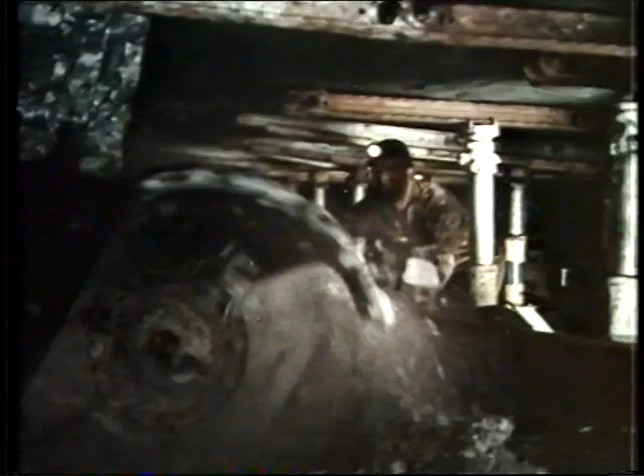Throughout the ages, man's comfort and economic progress have depended on fuel. And as man has advanced from the primeval swamp to the modern city, his demand for fuel has increased. But fuel is a wasting asset. The miner digs deeper into decreasing reserves. Axe and fire and erosion turn field and forest into desert.

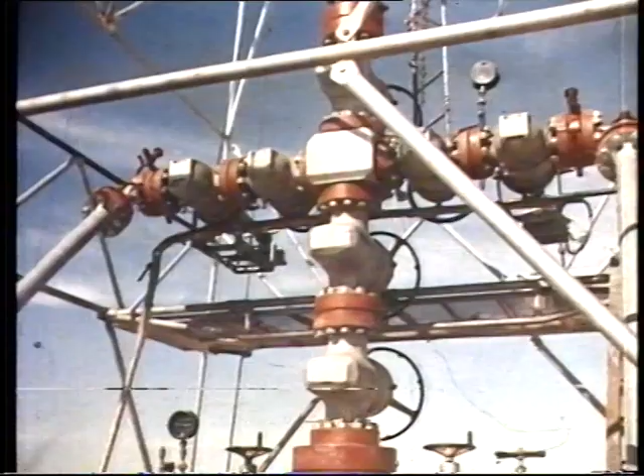Hence the unrelenting search for more fuel, more powerful, cheaper, cleaner, probing earth and sea. In the last century, they found oil, and with it gas, natural gas. For years, flared off to waste, knowing nothing else to do with it. Even later, when a use for it was discovered, it was confined to the country of origin, because no way had yet been devised of transporting it overseas.

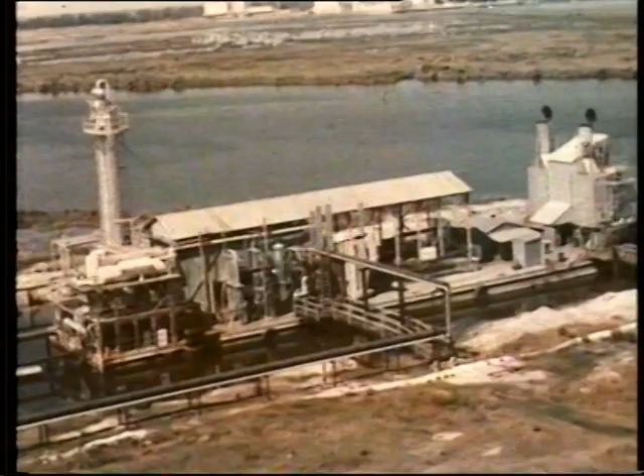Until 1951, when William Wood Prince, a Chicago stockyards executive, designed a special barge to carry condensed natural gas from his gas fields in Louisiana up the Mississippi River to use in place of expensive local gas.

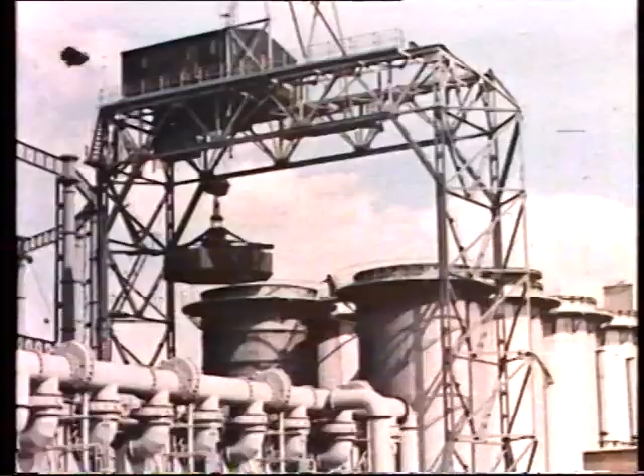This suggested to the British gas industry a solution to a growing problem, its dependence on coal. For a century and a half, coal had been the main raw material for the production of town gas. But with rising costs and increasing competition, new methods and other feedstocks had to be found.

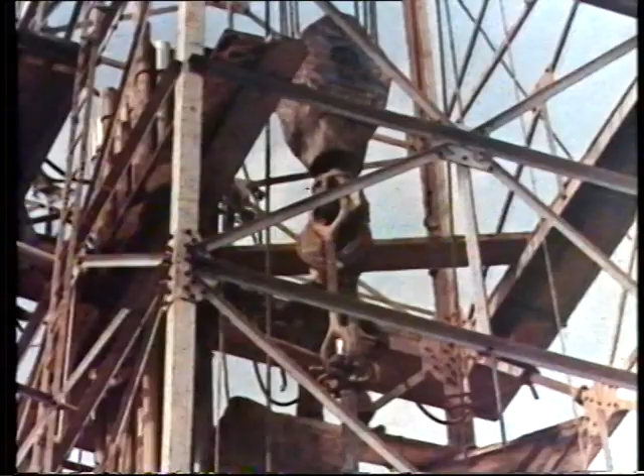The search for natural gas in the United Kingdom had been going on for some time, but with only small success. If natural gas was to be available to the British gas industry, ways and means would have to be found of transporting it from more plentiful sources overseas.

At the instigation of the Gas Council, Michael Milne Watson, chairman of the North Thames Gas Board, investigated the problem. And in the United States in 1957, Constock International Methane of New York were joined by the British gas industry to put all the years of experiment and research to the ultimate test.

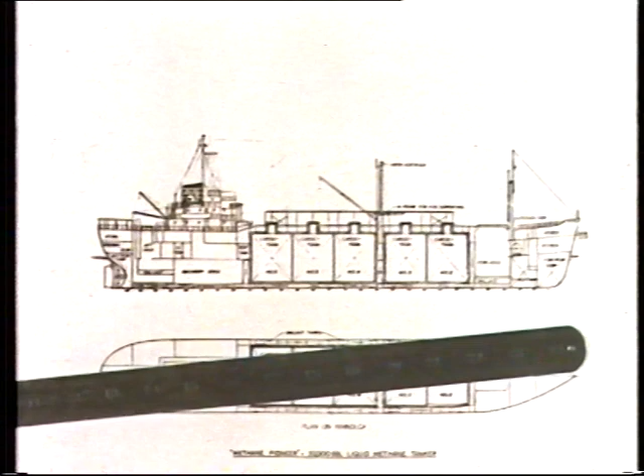At Mobile, on the Gulf of Mexico, they converted a dry cargo ship, renamed the Methane Pioneer, specially designed to carry natural gas by sea. The dramatic moment came at Lake Charles on January the 30th, 1959, when at last the Methane Pioneer set sail.

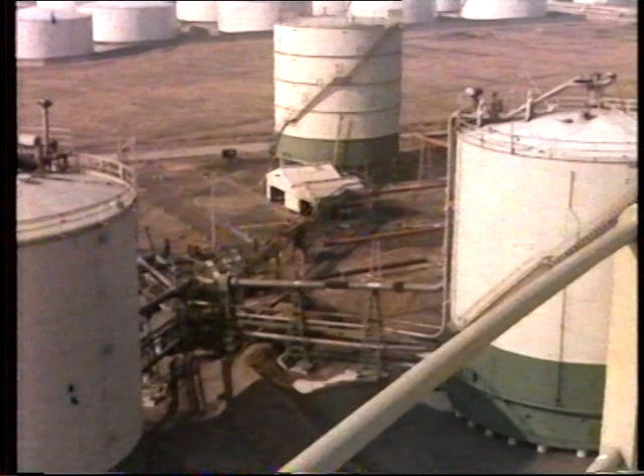Destination, Canvey Island, across 5,000 miles of sea. At Canvey, prototype methane storage tanks stood ready and waiting, while the tanker battled delaying storms. And critics on both sides of the Atlantic were saying she would never reach her destination.

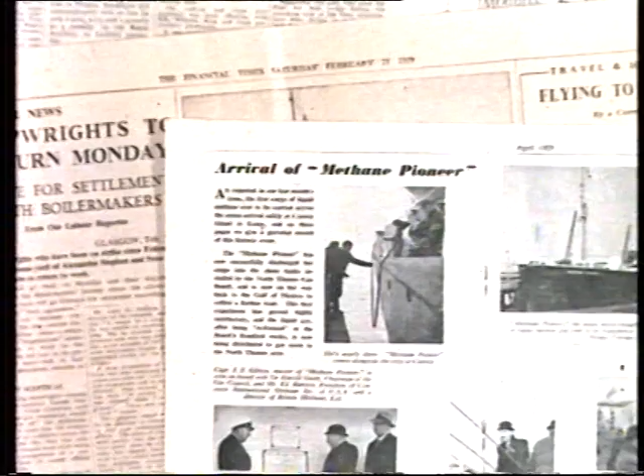But on February the 20th, 1959, the Methane Pioneer arrived. In her insulated holds, 2,000 tons of liquid natural gas, the first seaborne natural gas in the world. A way had been found.

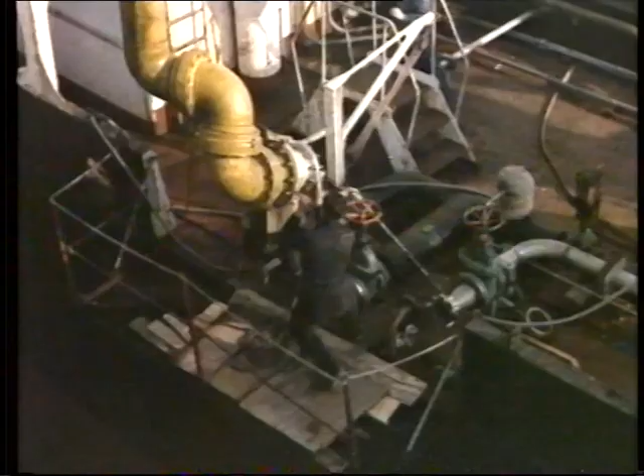So the 8 years of experiment and perseverance ended in triumph, and a new chapter in the history of world energy began.

Like a charred, lunar landscape in outer space. Suddenly, the third biggest gas field in the world. Hassi R'Mel means lucky well. Lucky for Algeria, who needed the assets. Lucky for Britain, who wanted the gas.

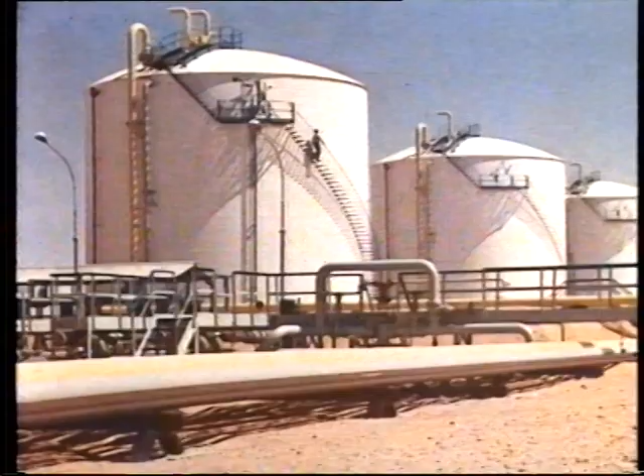In November 1961, the Minister of Power approved a contract to import 3,500 million cubic feet of Algerian gas annually. The stage was set for the plan to go forward.

At the London headquarters of the Gas Council, an operations room was set up to record progress on the biggest project of its kind this country had ever known, starting nearly 2,000 miles away in the heart of the Sahara Desert. This was the plan.

From the wellhead at Hassi R'Mel, there was already a pipeline to the coast at Arzew. At Arzew, a plant was to be built to liquefy the methane gas for transportation in 2 British-built methane tankers across the 1,500 miles of sea to Canvey Island.

At Canvey, a marine terminal to change the liquid back into gas and pump it out into the 350-mile pipeline from Canvey to Leeds. The schedule for this huge project was just 2 years.

Arzew. At the start of the methane project, a small port, suspended in time and space like a mirage between Algiers and Oran. In a country where past and present rub shoulders, as at some crossroad in history, where car and plane compete with the still surviving camel.

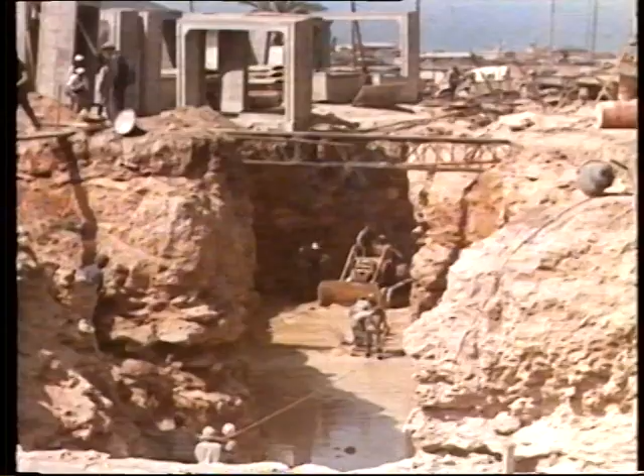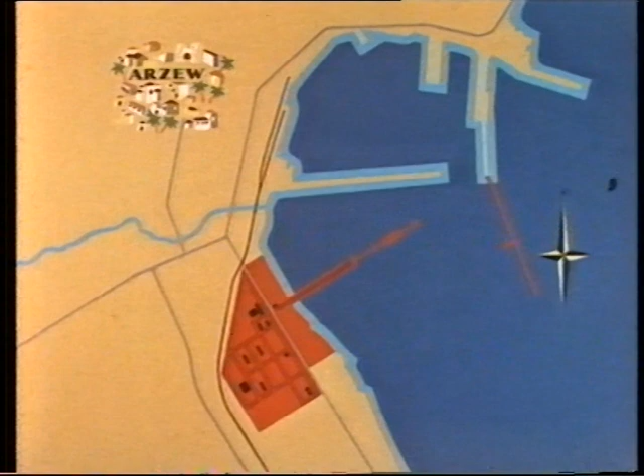For the Port Authority at Arzew, it meant dredging and new jetties to refashion the shallow harbor into a loading station for ocean-going tankers. For Société Algérienne du Méthane Liquide, it meant building the liquefaction plant, some of it on land reclaimed from the sea.

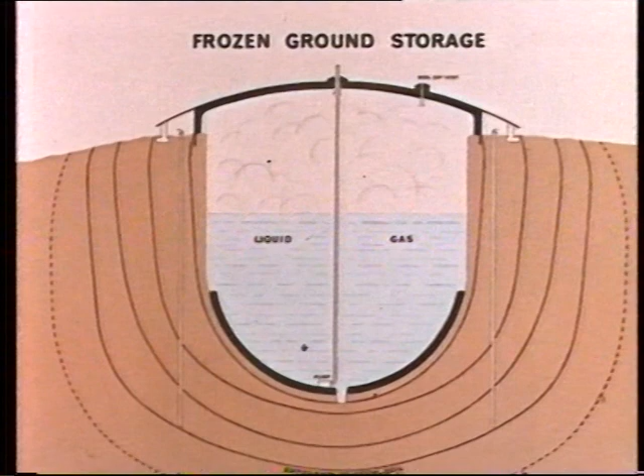Three special storage tanks above ground store a total of 18,000 tons of sub-zero liquid gas. And underground, another 18,000 tons, in what is basically just a huge pre-frozen hole in the ground, its icy walls kept sealed and safe by the cold gas inside. And finally, the building of the actual liquefaction plant.

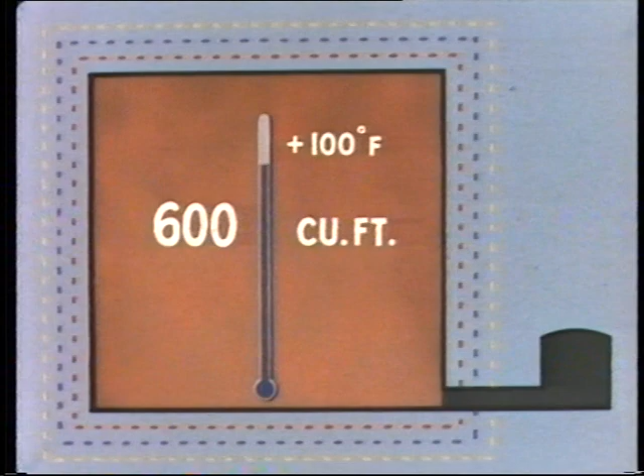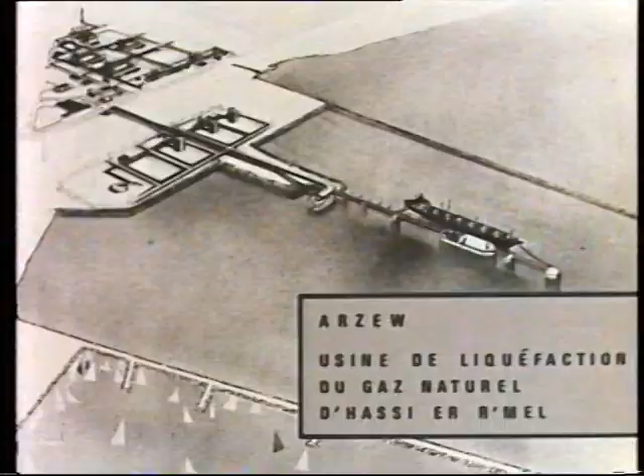To freeze every 600 cubic feet of gas down to an incredible 258 degrees below, at which it liquefies and shrinks to a single cubic foot of liquid. The enormous reduction in volume made it practical and economic to transport natural gas by sea.

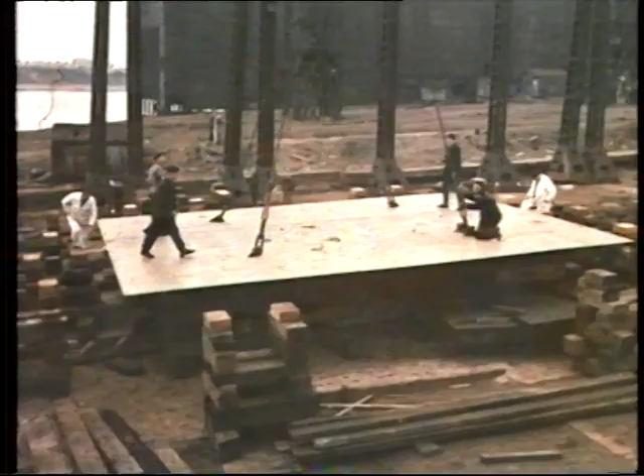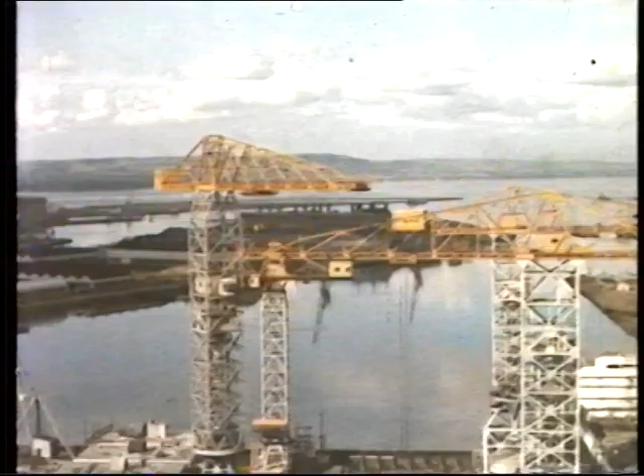At Vickers Shipyard, Barrow-in-Furness, the keel of the first methane tanker was laid in June 1962, exactly a year before the scheduled launching date. At Harland & Wolff, Belfast, the keel of the second tanker was laid four months later. Both tankers were built to the same secret and world-patented design, putting into effect the experience gained in the earlier trials across the Atlantic of the Methane Pioneer.

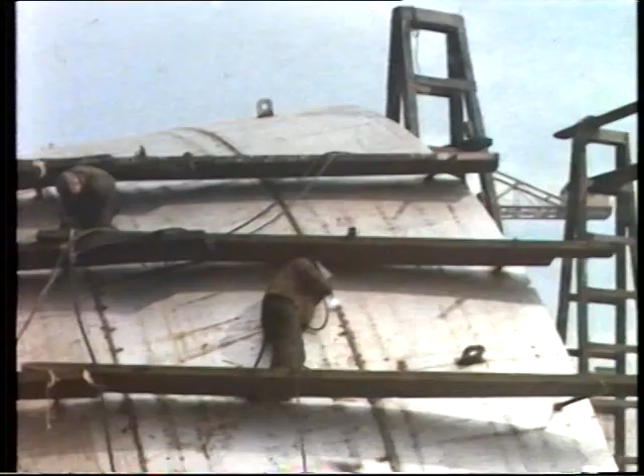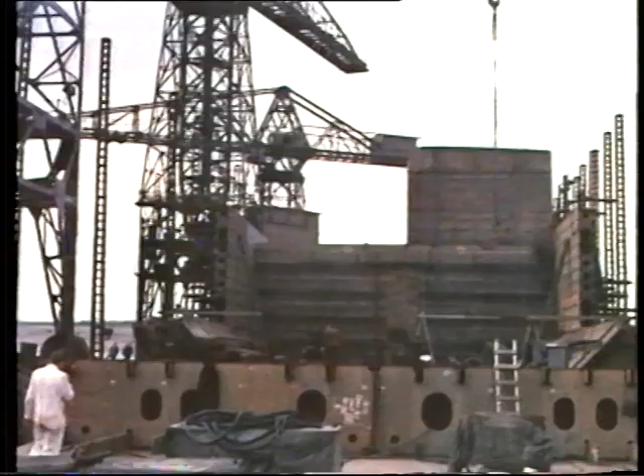The special features of the new tankers, the first in the world specially constructed for the transportation of natural gas, were ingenious and unique.

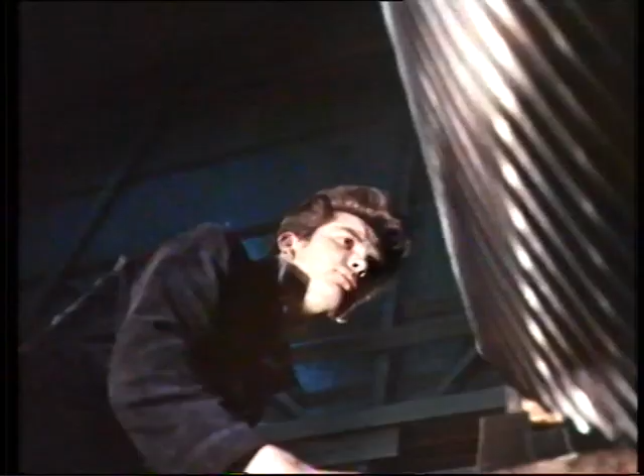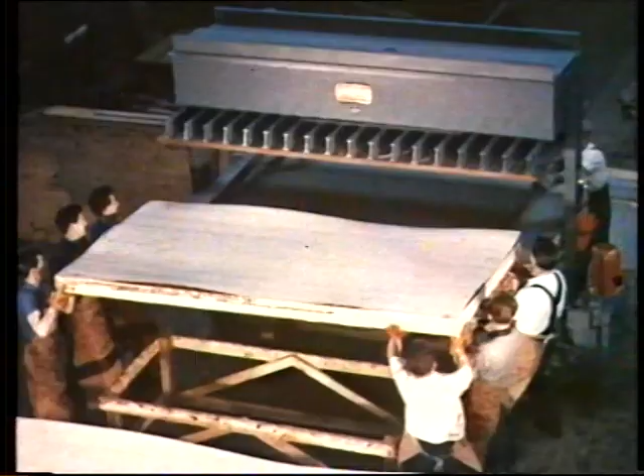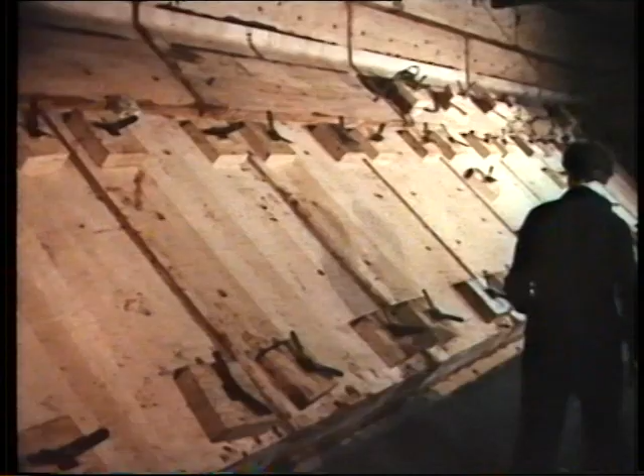The ship's engines, with up to 60% of the driving power supplied by the evaporation from the liquid gas in the cargo tanks. A double hull for greater strength and safety. Balsa wood from faraway Ecuador lines the three holds, not only insulating the cold gas against external heat, but also acting as a secondary barrier in the unlikely event of the gas escaping. The nine aluminium cargo tanks remain ductile and safe where steel would harden and split. By any standards, tankers as safe as any ship that sails the seven seas.

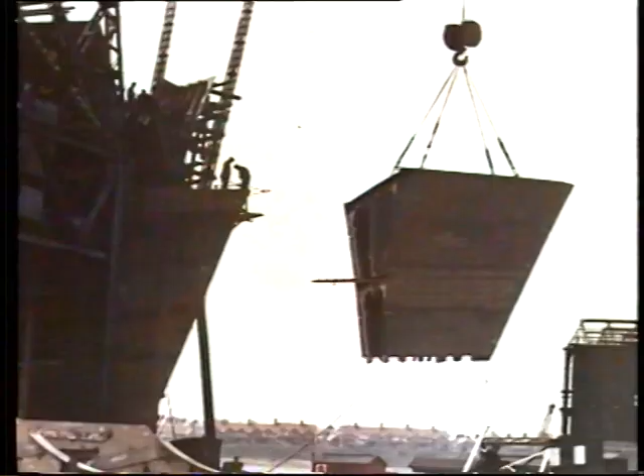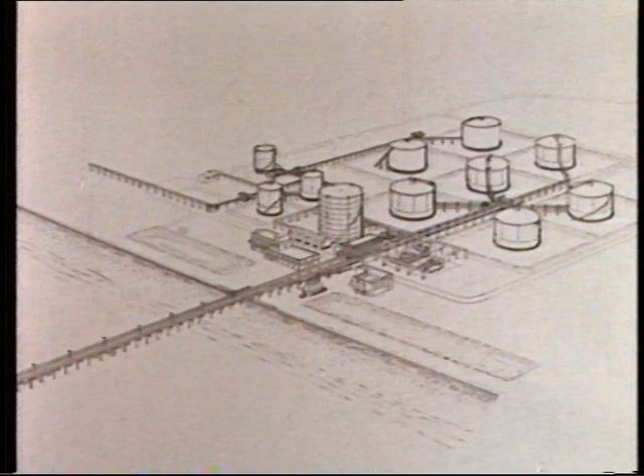If there was one project more fraught with problems than building tankers to transport something as cold and volatile as liquid natural gas, it was constructing an 85-acre terminal to handle it when it arrived, receiving 12,000 tons per week. The jetty, 750 feet long, standing on 300 concrete piles, like teeth, driven firmly into the river's mouth.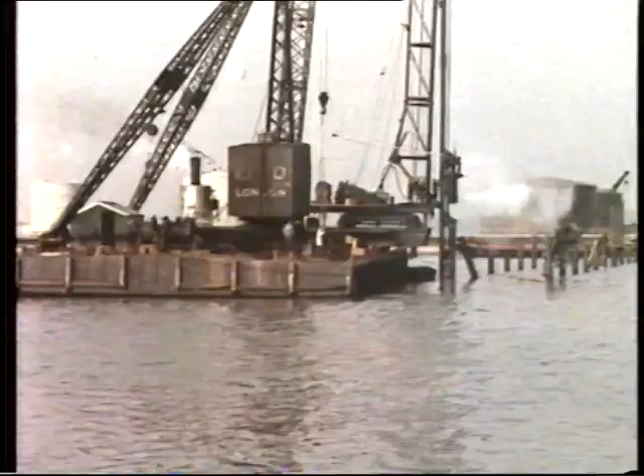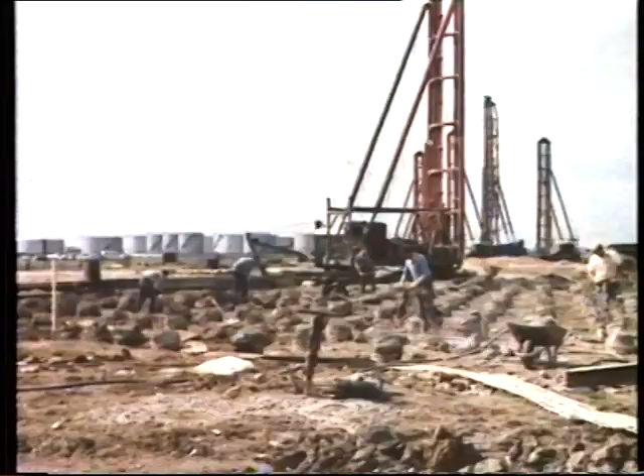On the site itself, more piles, to permit a free passage of frost-preventing air between the ground and the cold storage tanks above.

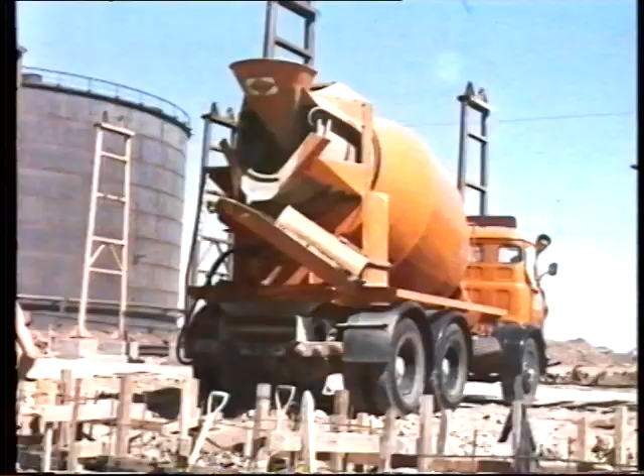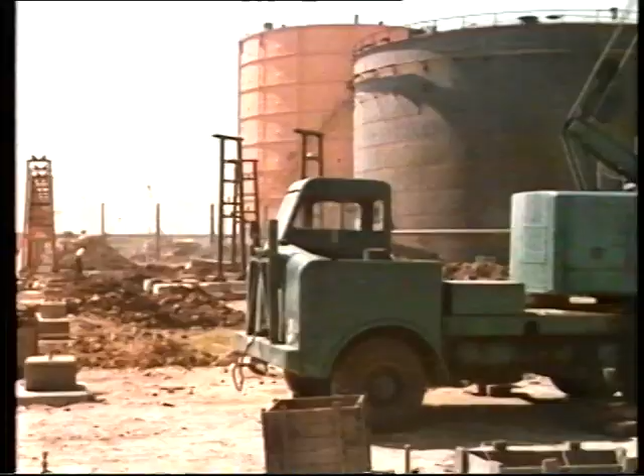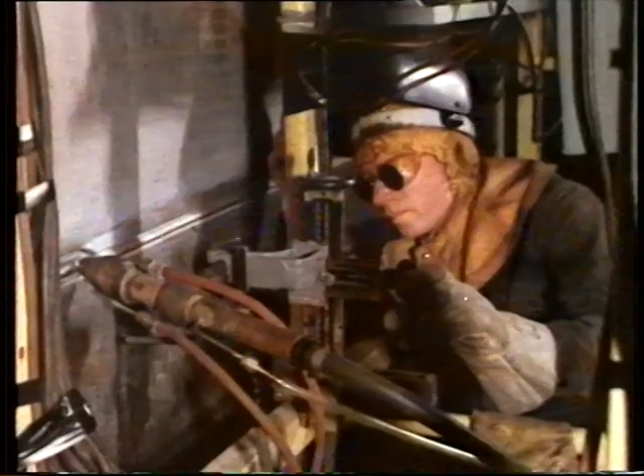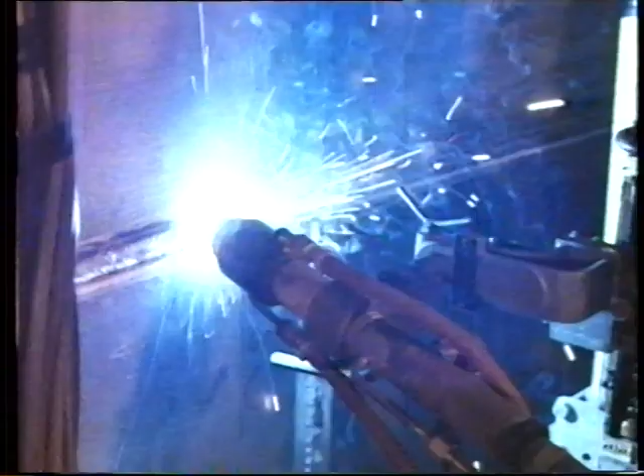Five storage tanks, the outer casing made of steel. The inner tank, which actually holds the liquid gas, made of aluminium alloy. Between the two, a special insulation to keep the gas at the necessary low temperature. Welding the aluminium had its problems too, requiring special techniques and flawless workmanship, with 100% radiographic check.

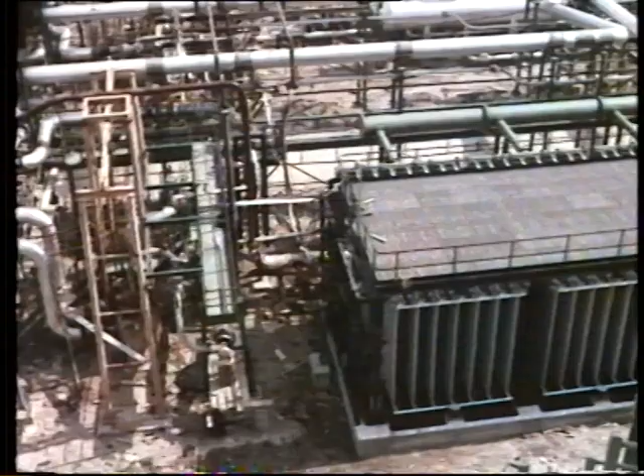Finally, the three evaporators, which with the aid of water from the adjoining estuary, convert the liquid into gas for transmission into the 350 miles of pipeline between Canvey and Leeds, with branches and spurs to London, Reading, Hitchin, Dunstable, Coleshill, Sheffield, and Manchester. By fire out of solid steel, the methane pipeline was born.

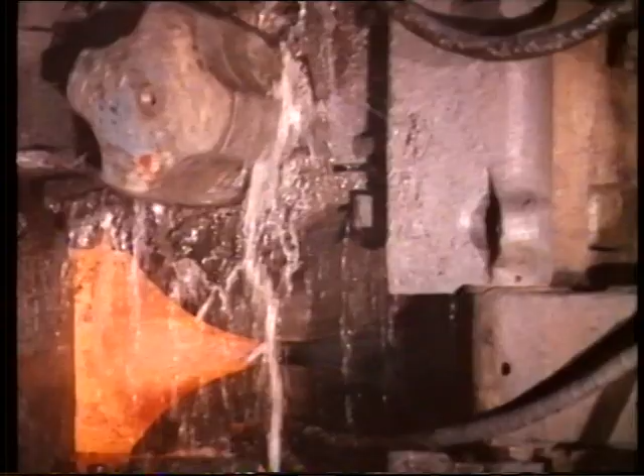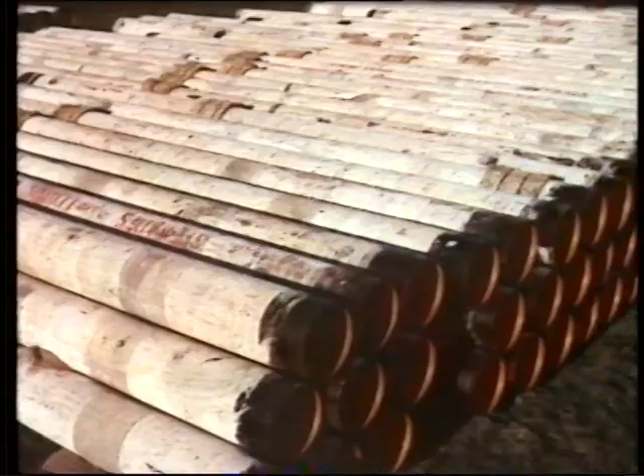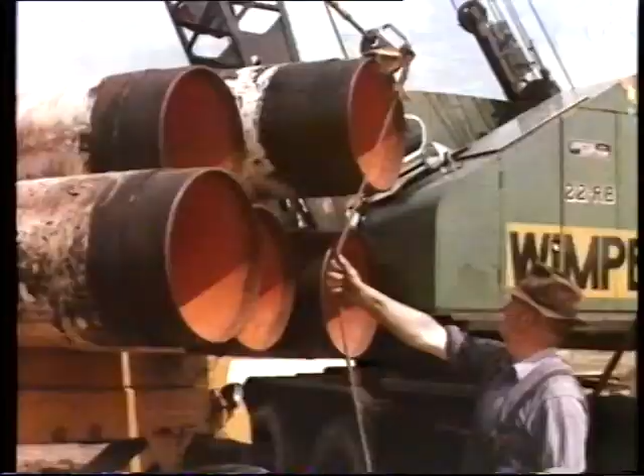Distributed along a 400-mile supply line to dumps set up strategically along the pipeline route, and from the dump to the site.

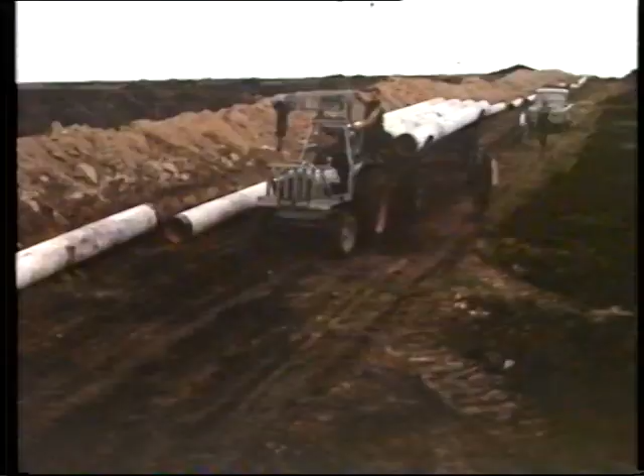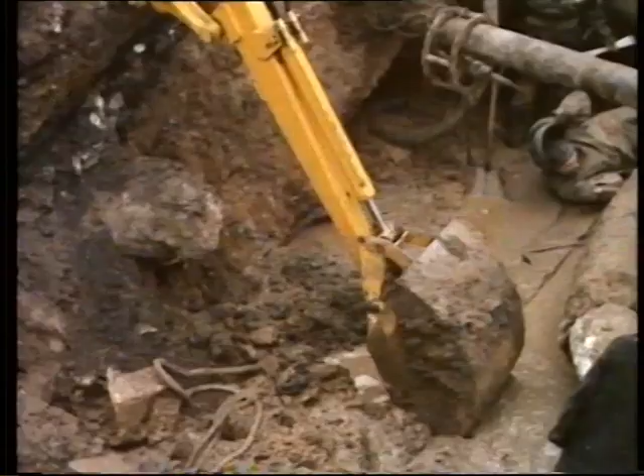Work started on the pipeline in late autumn 1962. The deadline for completion, October 1963. It would be a long haul, and winter loomed ahead, with such handicaps to men and equipment as rain, mud, ice, and snow.

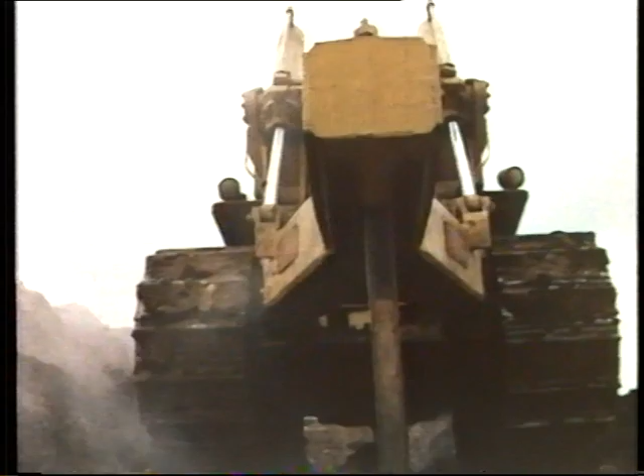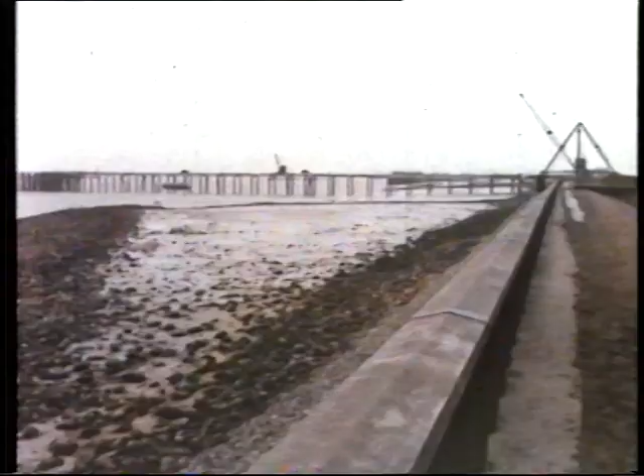Winter came suddenly, bringing snow and ice on roads and railways the length and breadth of the country, the worst winter for nearly a century, threatening to bring the methane project to a standstill. At Canvey Island, the site of the new methane terminal and jetty, immobilized and silent.

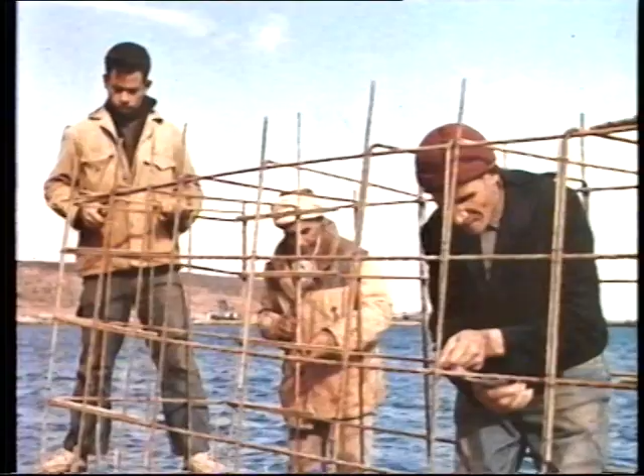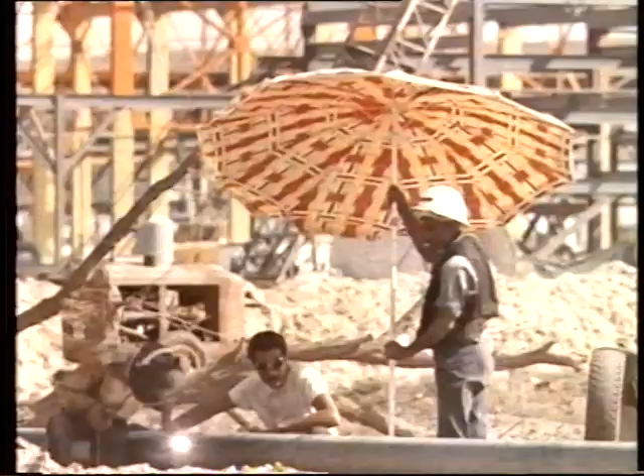Winter in Arzew, where work on the methane project was just a walk in the sun. The site of the liquefaction plant on the coastal plain, like a devastated area, with the urgent work of reconstruction well in hand.

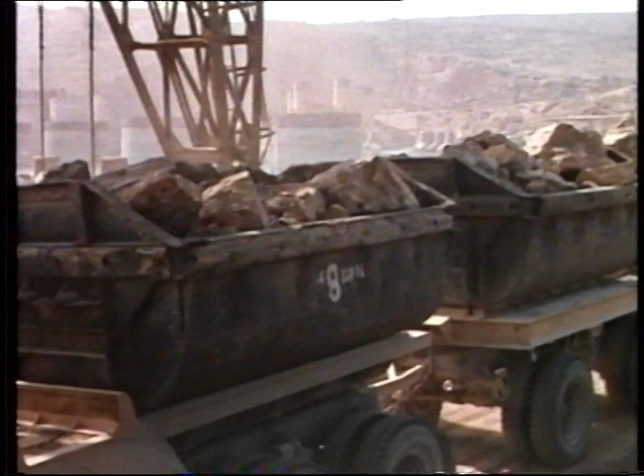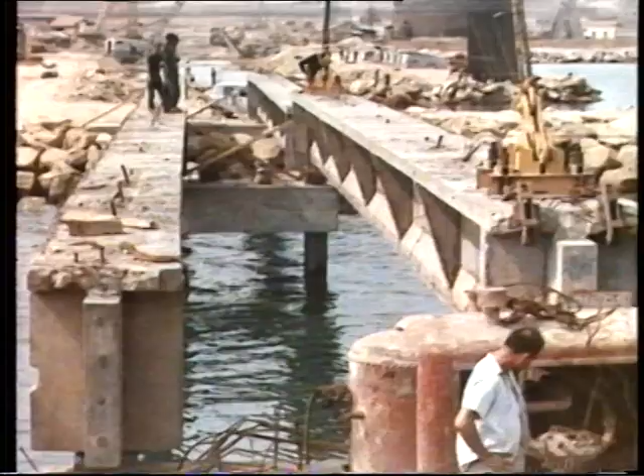What the people of Arzew thought about it was simple. They were for it. Next to the Aswan Dam, it was the biggest industrial project on the African continent, the first commercial liquefaction plant in the world.

In Britain, at last, it was spring 1963. The pipeliners could now press forward across the country, surveying the route from pole to pole, by land and water, along a right-of-way negotiated with more landowners per mile than any pipeline ever laid.

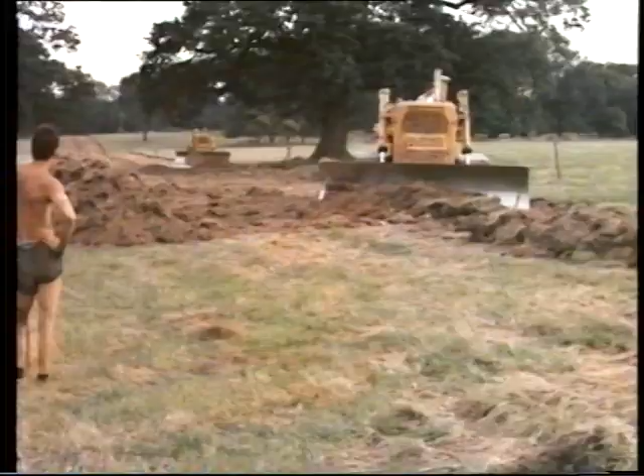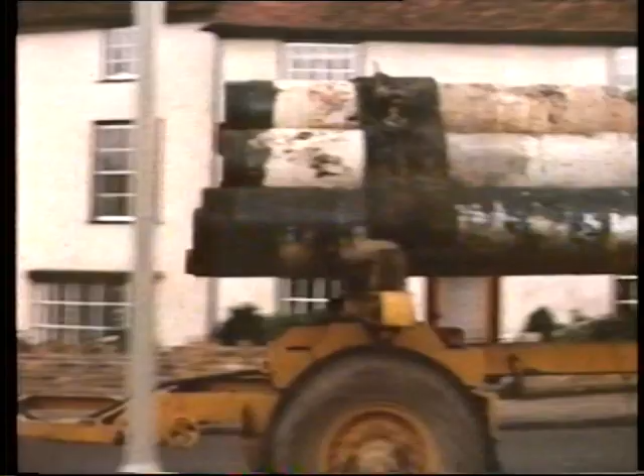Strip the topsoil neatly to one side, clear of the subsoil to follow, ready for eventual reinstatement. East and west, and south and north, the pipes ride fast, moving up the now open supply lines to the battlefront, from the dumps to the sites along the pipeline.

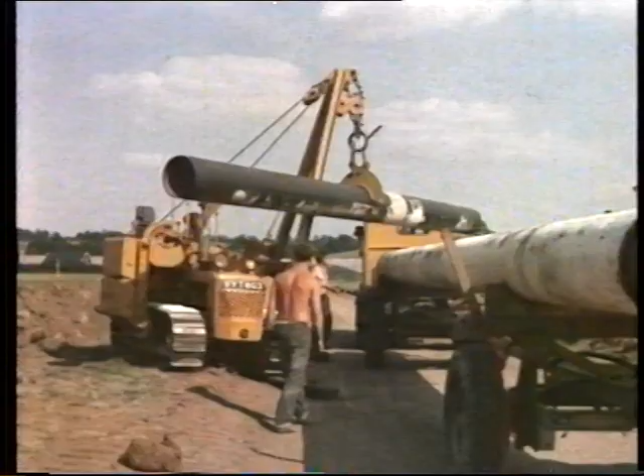Across the uneven patchwork of Britain, they applied the same spread technique of pipelining, originally designed for endless miles of flat desert. The specialist teams follow each other up, always hard on each other's heels. First, the stringers, who string the pipes along the line. Then the welding team, who bring the pipes together. Steady now.

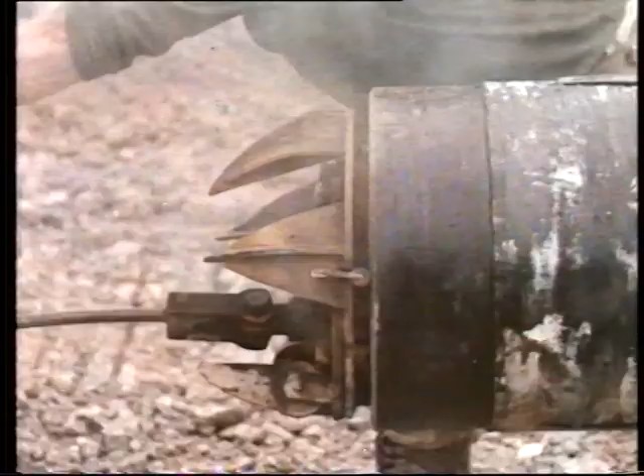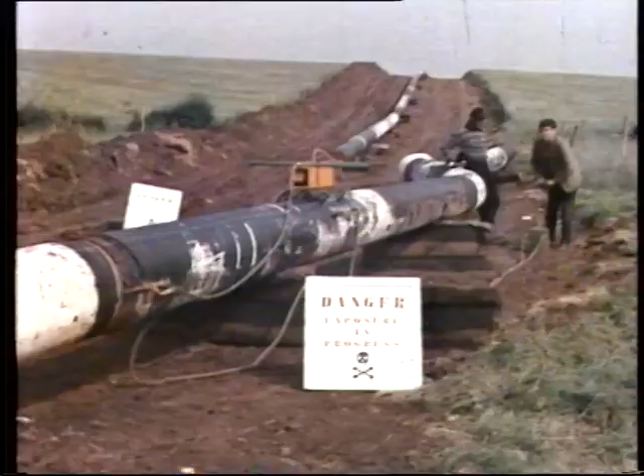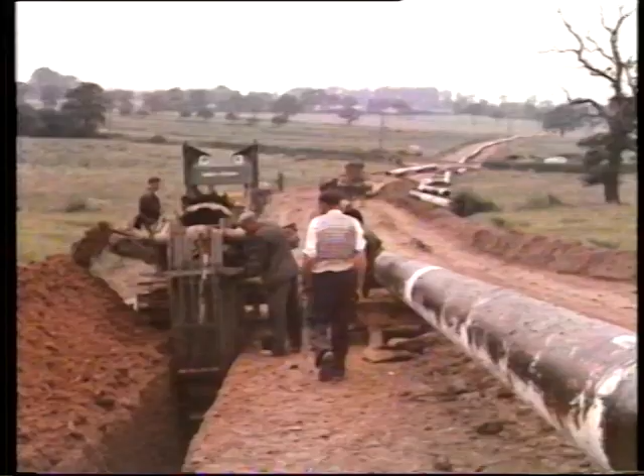The radiographers photograph selected welds. The films are studied by experts trained to detect the slightest flaw. Trenching, straight as a die and exact to an inch. Before the pipe is dropped, the welded joints are wrapped in tar and fiberglass, and a final high voltage test checks the wrapping.